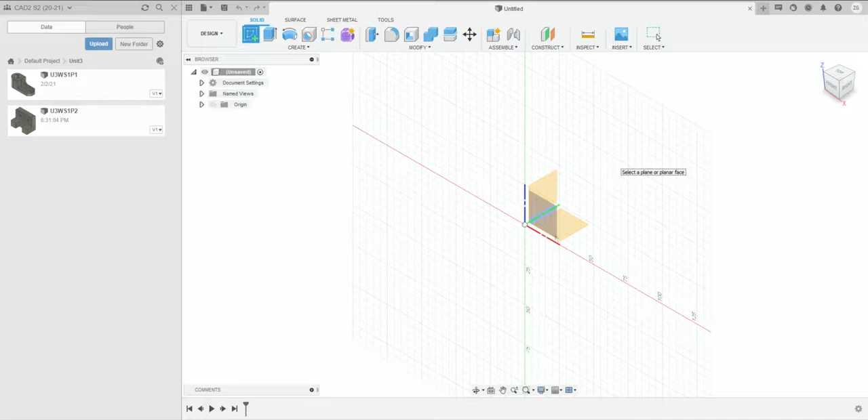All right, so for part 4, I'm actually not going to sketch on the XY plane. I'm going to sketch up on the YZ plane, I believe. And what I'm going to draw is just the shape that we can see on the right side of the isometric view, or the curved shape on the front view.

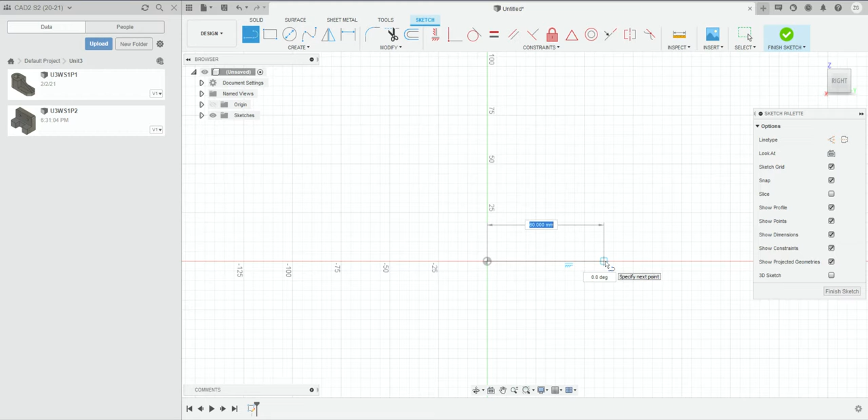And so what that consists of is the bottom, which is 40 wide, and then 40 tall before we get to a circle.

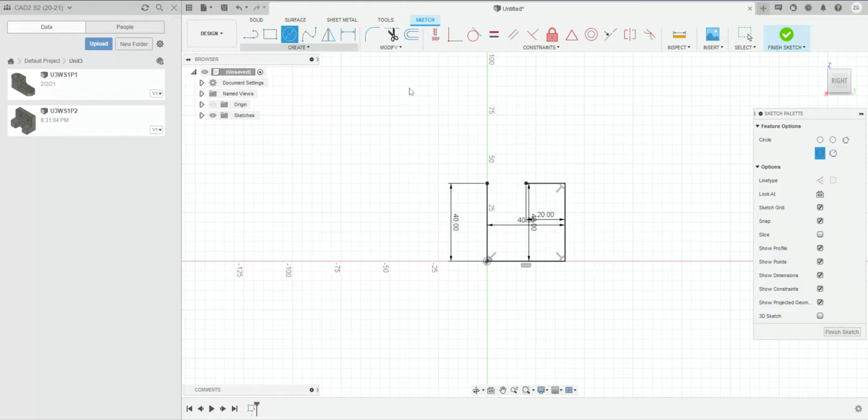And I'm not even going to put the hole in it. I'm just going to put this outside shape. So I'm going to finish my sketch and extrude. And we want this whole region, and the distance that we want it should be 55 millimeters.

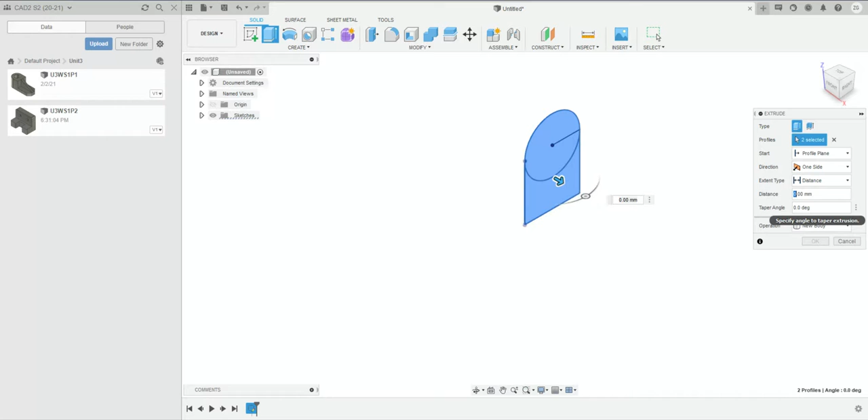From here, I'm going to right click on this flat edge and I'm going to draw a sketch here. So, create sketch.

And this I'm going to make the rectangle that we can see in the side view. The rectangle is 35 wide. And since this is 55, 55 minus 35 is 20. And then 20 divided by 2, since we want this to be centered, is 10. So I'm going to go in 10.

And then I'm going to make a rectangle that is 54 high and 35 wide.

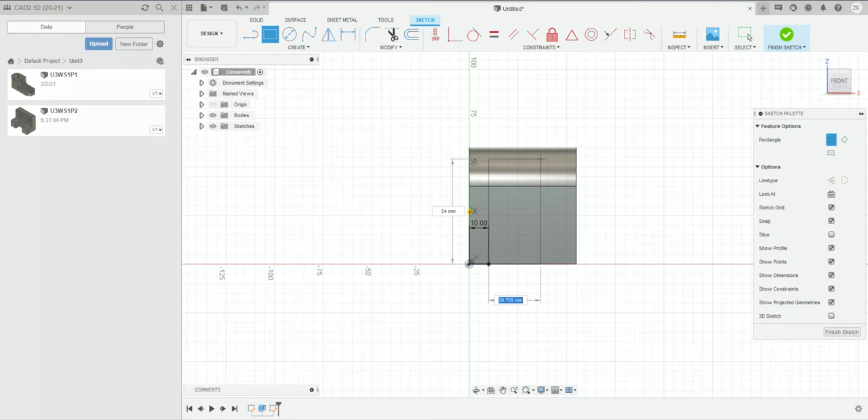Now, I'm also not going to add the circle here. I'm just going to extrude. I'm going to extrude this entire rectangle, but the way that we're going to do it is two sides with different lengths, because this side just has to go a little bit, and this side I actually want to go all the way through the shape to the other side.

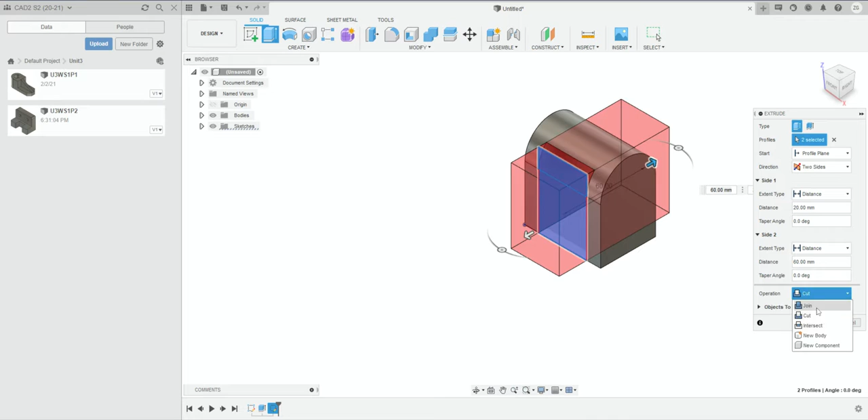Now, you'll notice as soon as I start intersecting with an already three-dimensional shape, it starts to cut away. We don't want it to cut. We want it to add more stuff, so I'm going to click the operation to join, and now we actually have to make these distances

specific, deliberate. So the first distance should just be from the face that we drew on out, and that's going to be 12 and a half, which we can see on the top view.

And then from that face all the way to the other side needs to be the rest of the 65 millimeters. Now, 65 minus 12 and a half is 52 and a half. And so that's what I'm going to put in for the second measurement.

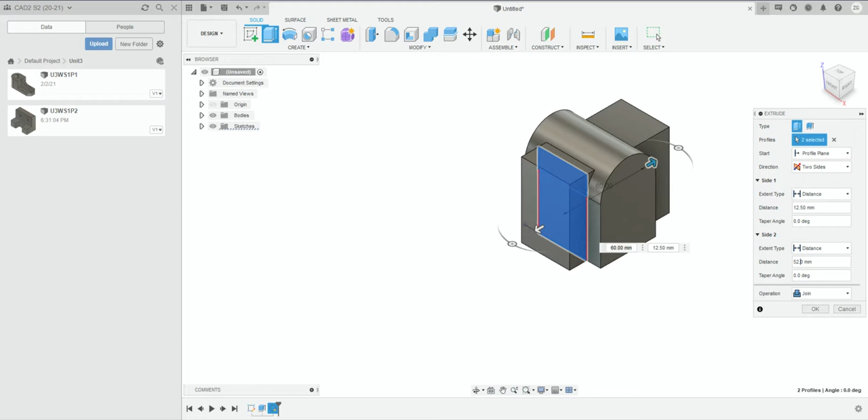And then I'm going to accept it, and I'm going to look at the side view here to make sure that it looks centered, and it does.

So now at this point, we can actually start to put holes in the shape, and the reason that I'm waiting until now is because we wanted to have the full three-dimensional shape before we started cutting anything out. Otherwise, if we put holes in right away, that second extrusion would have blocked the hole when it went through the shape.

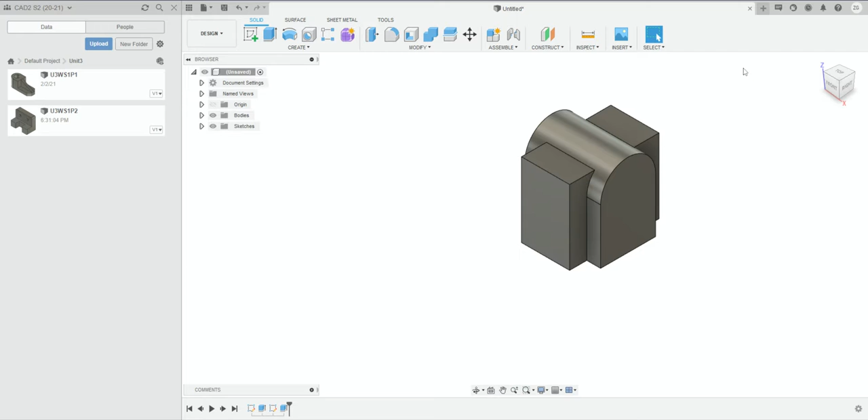So now that we have the holes cut out, we can see that they go all the way through, and we have this bottom edge cut out. Then we can start to fillet the corners.

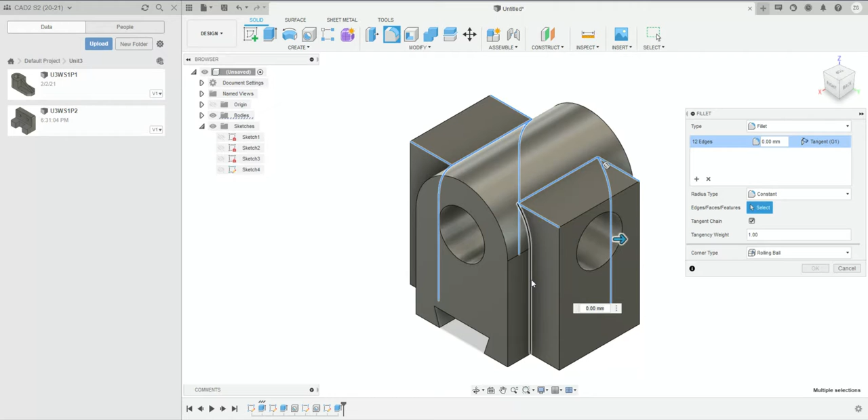And so for that, we'll get the fillet tool, and I think all of the fillets are a radius of 2 on this drawing. So I'm going to click some of these edges, and then we can put the measurement in as 2. That should make it look like the drawing.

The last detail we need is the notch on this side. So I'm going to make a new sketch here based on the circle, and I'm going to make a line from the center of the circle that goes out.

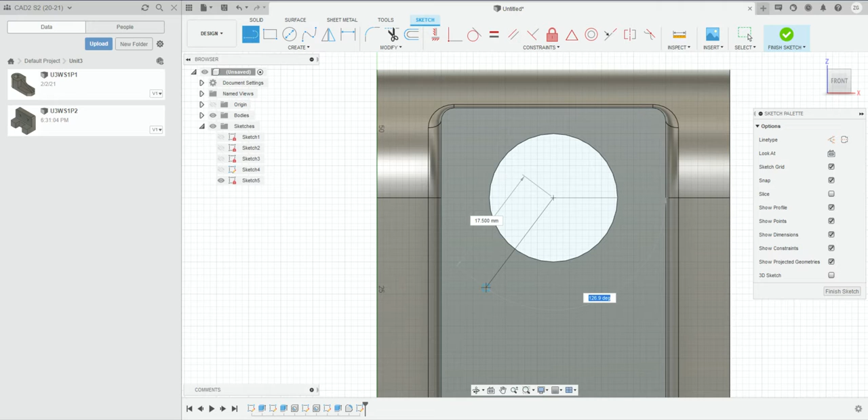Now the radius of the circle is 10, and the inside of this should go out a distance of 5, it looks like. So I'm actually going to go out just based on the degrees, which is 90 plus 35, or 125.

And I don't mind how long the line is. We can fix that in a moment.

But then what I want to do is I want to go 2 in this direction and 2 in the opposite direction, because the full width of this notch should be 4.

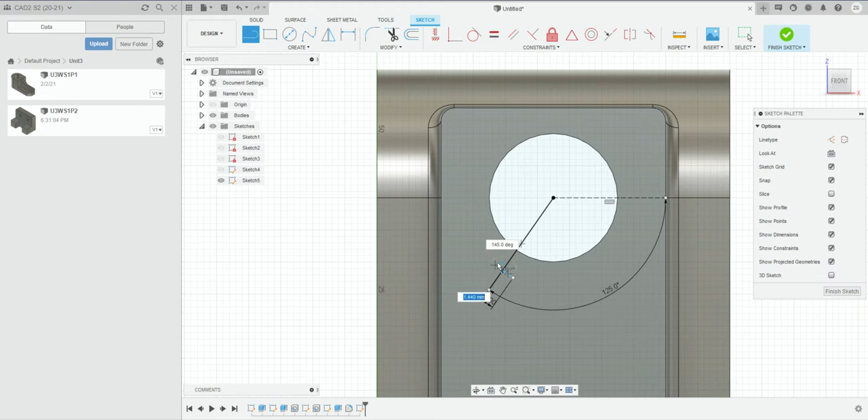Notice that these lines have a perpendicular constraint. And then I'll make the lines back up to the circle. Now these lines are just about 4 long, but they need to be 5 long.

So I'm actually going to go out an additional 1, and connect those 2 lines before I extrude my shape, which is this inner rectangle. I also need to make 1 line on the inside here, so that is a closed shape.

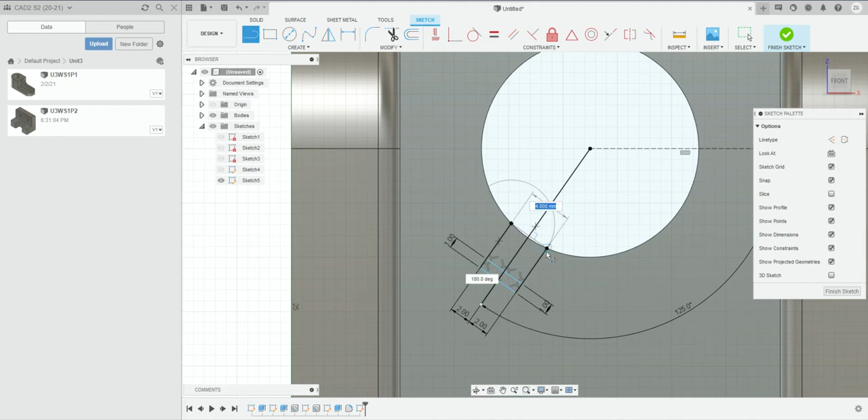If I finish sketch and press extrude, I can choose these quadrants. And let's get the home view. We're going to cut, and the distance actually isn't on the drawing, but the distance is 10.

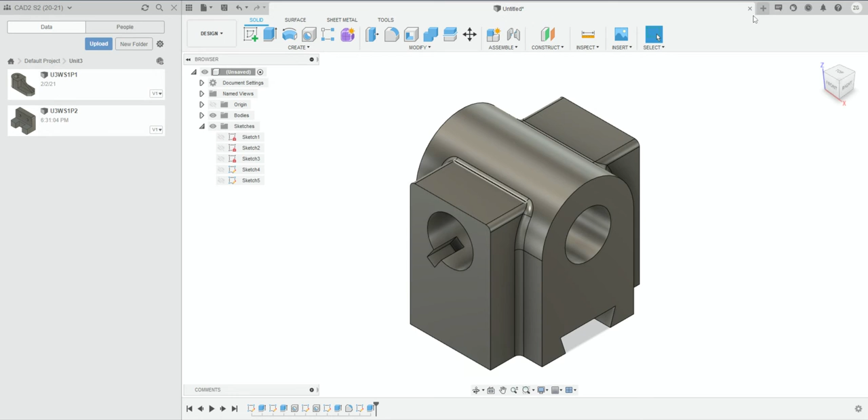So I'm going to, that's where it stops. There is negative 10. Press OK, and our drawing should be finished.